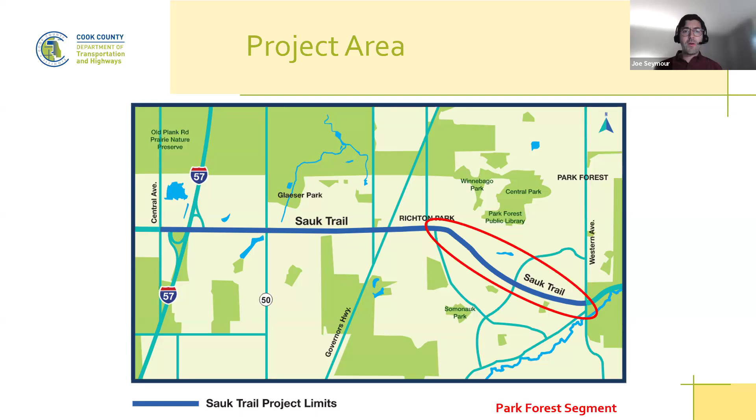Now, why are we here? Well, the organization, the South Suburban Mayors and Managers Association, submitted an STP Shared Fund application to look at all 14 miles of Sauk Trail to look at improvements. This was a community-driven grant application. Now, we at the county, because this is our roadway of jurisdiction, we're looking at specific chunks of Sauk Trail and how we can evaluate the needs and transportation challenges of these segments and address them in a thorough way as well as in a manageable way. And so again, we're looking at this 4.2 mile segment between Western and Central. Next slide.

Now, whenever we approach projects at the Department of Transportation and Highways, we approach it through the lenses of safety and complete streets. Now, safety, we're looking at safety for all road users. That's people walking, biking, using mobility devices, as well as driving and using transit or trying to access transit.

For complete streets, you may have heard of that phrase before. Complete streets means that we approach designing a roadway for all of its road users so they can access the facility safely. So that, again, means for pedestrians, people bicycling, transit users, we want to make sure they can use the corridor in a safe, efficient, and predictable manner. And again, we're looking at this through the lens of all modes. Next slide.

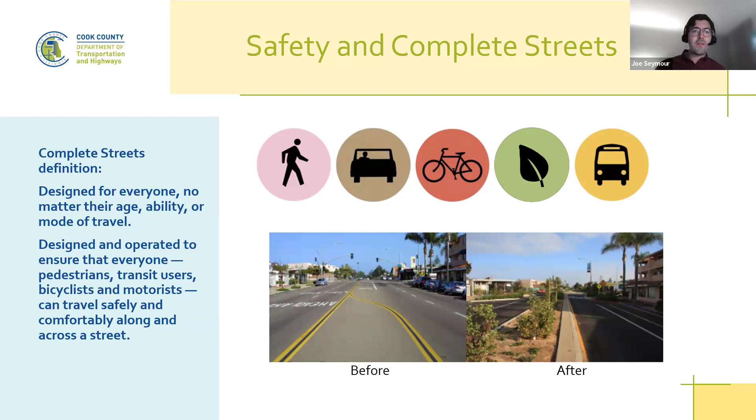Now, one specific objective we're looking at for this study is the provision of a low-stress bikeway along Sauk Trail. As you can see through the image on the left and on the right, in South Cook County, there are very few east-west low-stress bike corridors. Many of you may bike or walk on the Old Plank Road Trail. Well, we look at Sauk Trail as an opportunity for an east-west bicycle corridor that can also be used by pedestrians, such as a shared use path or multi-use path.

Now, our bike plan that was published last year had a goal specifically of all residents in Cook County being within 1 mile of a low-stress bikeway. Now, what's a low-stress bikeway? It's something that whether you're 8 years old or 80 years old, you feel comfortable using. And when we design for a low-stress bikeway, we're going to make sure that the majority of people are going to feel comfortable using that facility. Low-stress bikeways are also connected, and so we're looking at how would a facility along Sauk Trail or other facilities within Richton Park and Park Forest connect together to build out a network of low-stress bikeway facilities across South Cook.

Another thing we understood through looking at the bike plan for the county last year and this study is that Sauk Trail has already been identified by the villages of Park Forest and Richton Park as a corridor desiring bicycle and pedestrian improvements, whether that's in the Richton Park Town Square Plan or in the Park Forest Active Transportation Plan. This is something that the community has already identified for improvements, and we're looking to get a better sense of what are the challenges to improving this corridor so it supports all users safely and comfortably.

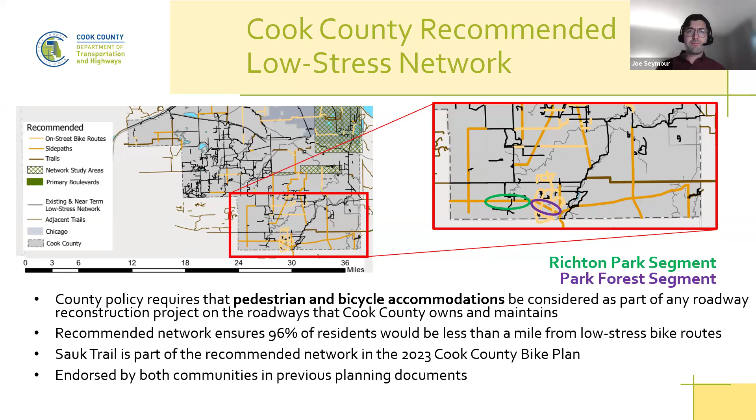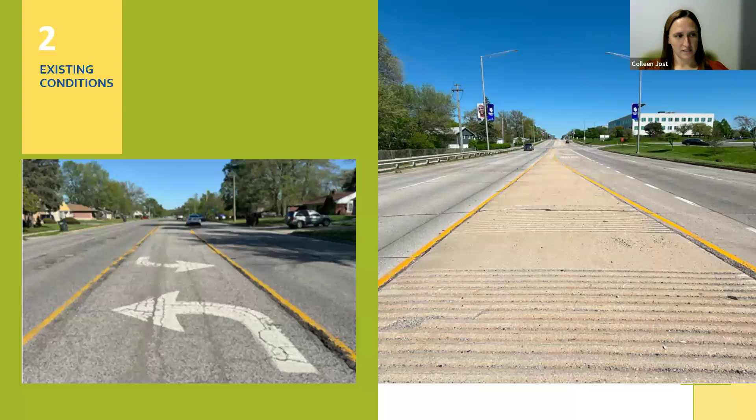So this project kicked off at the beginning of 2024, and our first step was to develop an existing conditions report. So what we did was we compiled all the existing condition data that we could, including land use data, traffic volumes, crash data, utility information, environmental resources. We reviewed existing reports, studies, and planned projects in the corridor. We also took inventory of the existing infrastructure during our site visits and reviewing aerial imagery.

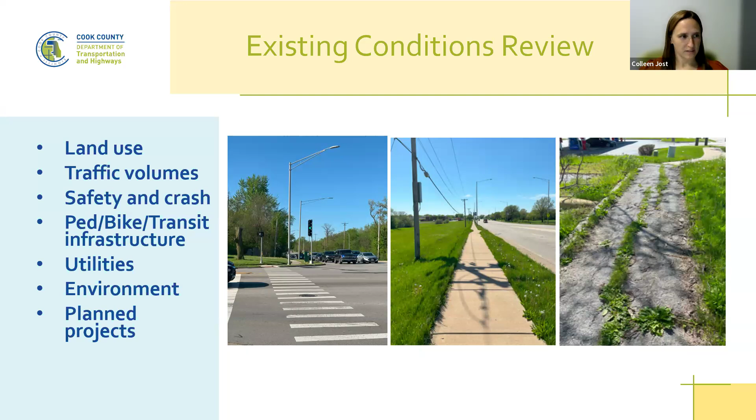What we found was along the corridor, the typical section for Sauk Trail consists of 2 lanes in each direction with additional turn lanes in different configurations throughout the corridor. Some locations there's a median 2-way left turn lane. Other locations have pocket turn lanes with mountable median islands. But generally there are 2 lanes in each direction through this corridor.

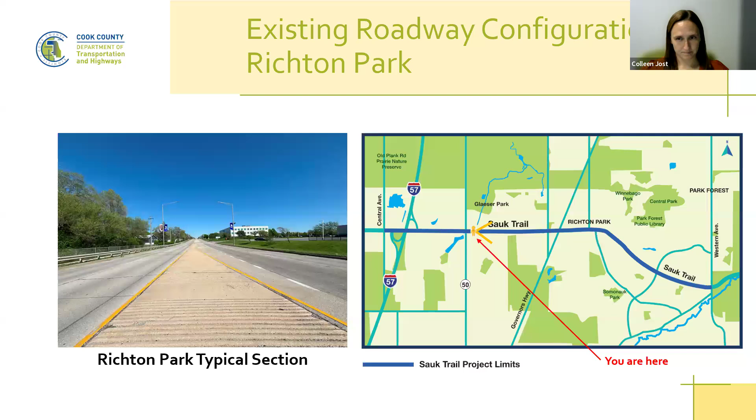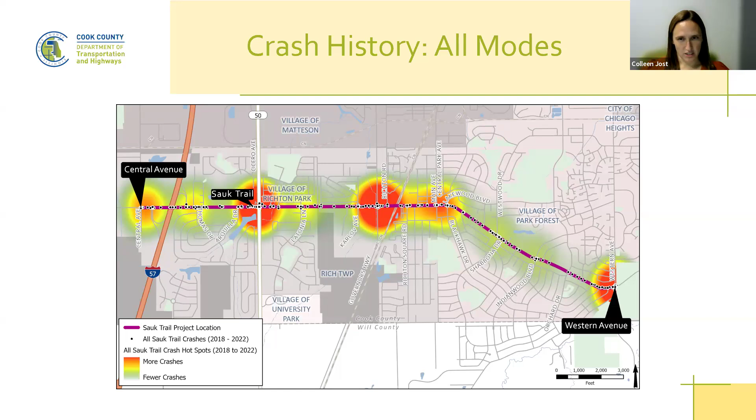The heat map shown here highlights where crash locations are concentrated. The red bubbles are those locations which are mostly at major intersections. The corridor for vehicular crashes mostly has rear-end crashes and turning crashes, which can be attributed to speeding, congestion, and the like. The hotspot locations for vehicles and pedestrians are similar.

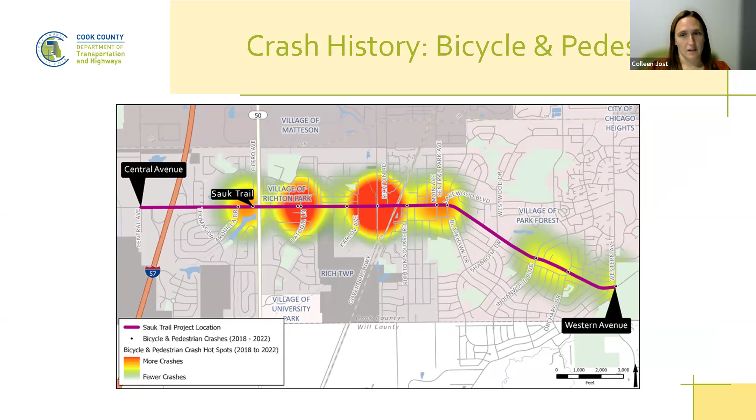So next slide, we recognize that the Richton Park Town Center plan was just completed, and it describes the vision that the community has for the town center, centralized around the Metra station to provide a safe corridor and town center. Our recommendations in this study will complement the recommendations in this Richton Park Town Center plan.

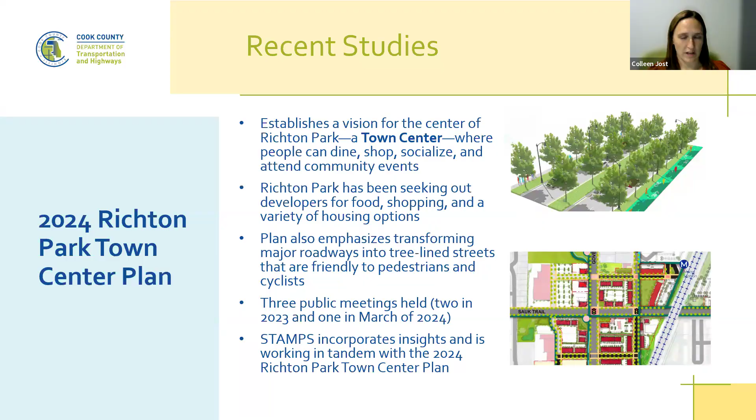So after this slide, we're going to open for any discussion and address any comments that you may have at this point.

Great, thank you, Colleen. So we do have one question so far, and that is from Ms. Kelly Smith. She is asking how this initiative will impact motor traffic, particularly in peak hours. Hi, Kelly. That's a good question.

Now, at the moment, we don't have the results of a traffic analysis done, and that's because we haven't put forth, let's say, alternatives or design improvements for the feasibility study. So we don't know the impacts of what improvements could be because we haven't identified those yet. We're not at that stage. We're still at the listening stage, to identify what those improvements are.

And so as we're going through the presentation today, if there are comments or questions about improvements to the roadway that may, let's say, have an impact on motor vehicle traffic or congestion, we'll take those ideas in and evaluate them as part of the next stage of the project. But we don't have any results yet to share.

If I could just add on, Mr. Smith, apologies for that incorrect address previously, but I just want to follow up on your question. So primarily, the purpose of this study is to look at moving more than just cars. We want to move bicyclists and pedestrians safely and efficiently through the Sauk Trail corridor. So the goal here would be to look at ways to safely do that.

Okay, so on the next slide, based on the type of community input regarding the needs that we've heard from those in-person meetings and from the advisory council, we did start to look at what types of design tools we could implement along the corridor to better meet some of those needs. And Joe just ran through some of those that we had heard. So I'll jump into it here. One of the design tools that we identified was providing a green median.

So Colleen walked through the cross sections, particularly on the Richton Park side, where there's that mountable curb that you can actually cross over and use. Some of the two-way left turn lanes in the Park Forest section are used maybe not necessarily for turning, but as passing. So putting in something like the green median could eliminate the opportunity to use the center left turn lane as a passing lane. The green median also typically slows vehicles down. It creates more of a boulevard feel.

And this green median also creates a two-stage crossing for pedestrians, meaning that they can leave one side of the road, get to the center, and they've got a refuge there. So it's a little bit safer, makes them more comfortable, and allows additional spacing for vehicles and additional time for gaps without being stuck in the middle in a two-way left turn lane. So this is an option to be considered as we move forward.

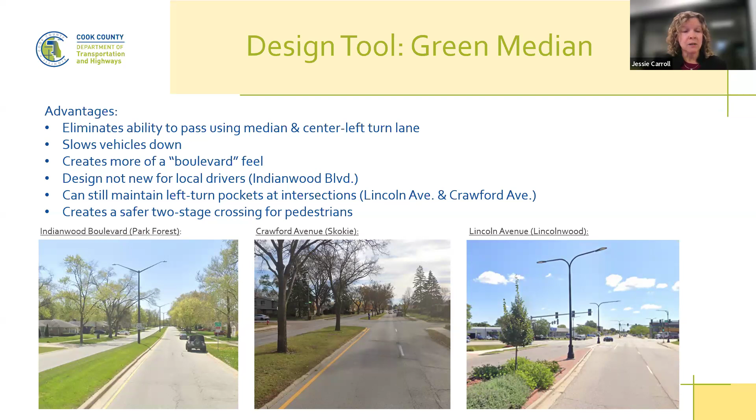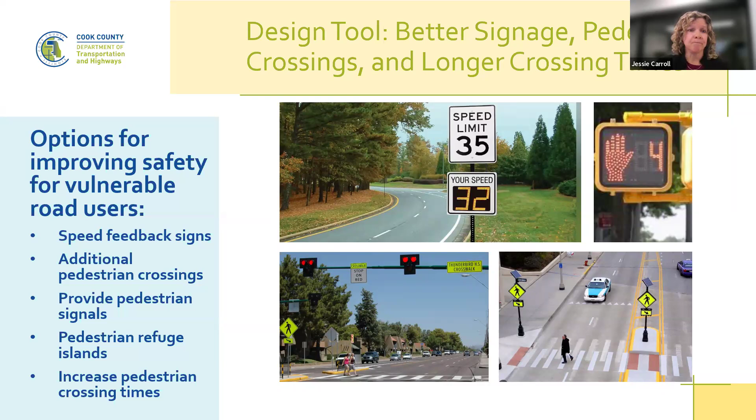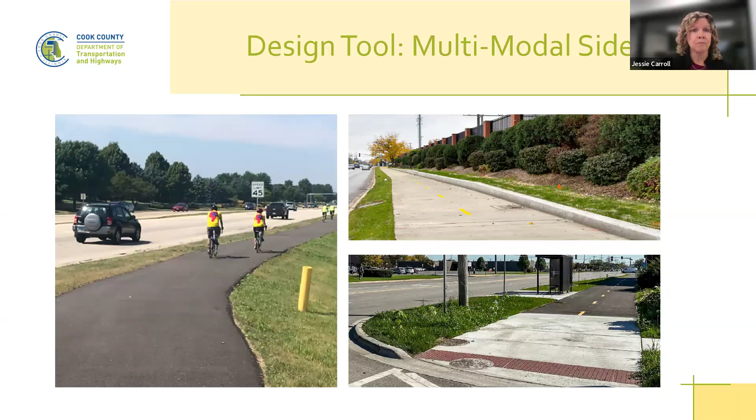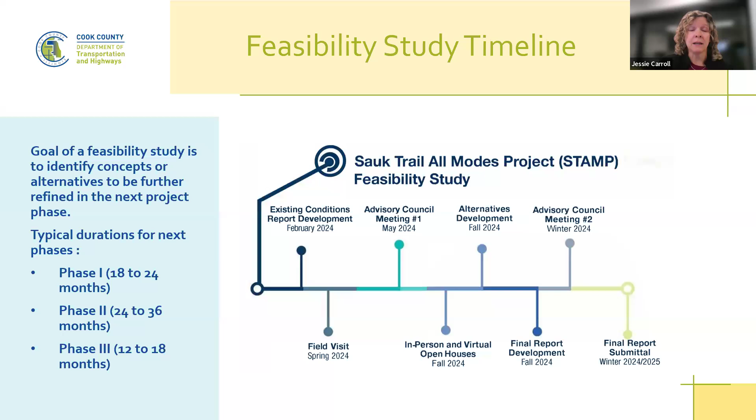The phase two is really the design phase. That runs about 24 to 36 months, depending on if there's any additional communication or coordination that needs to happen with different agencies. So that's typically 24 to 36. And then phase 3 is the construction phase, and that runs usually about a season or two, 12 to 18 months. So that's kind of the outlook here for the full project into implementation on the left side. So that's kind of where we are now.

And this last slide is really just to open it up for discussion. So I'll go ahead and do that and turn it back over to, yep, thank you, Chloe. Of course. So we did get a couple of questions come through from Mary in the Q&A chat. So we have moved those over into the general chat.

So Mary first asked, she says she lives on the north side of Sauk Trail. How much of her property or parkway is she going to lose?

So I can start. You know, the goal of this study is to work within the limits of the property that Cook County already owns. So we call it right of way. And so I'm going to turn to my team real quick here. This corridor itself, what is the length of this study for Sauk Trail? So the corridor is 4.2 miles long.

Yeah, so for 4 miles, the existing right-of-way limits vary throughout the corridor, but the intention is that we work within the limits of the property owned by Cook County. So Mary, I'm not sure about the specifics, but the intention would be that we would avoid or minimize any acquisition. Mary, do you want to expand upon that? I hope I answered your question.